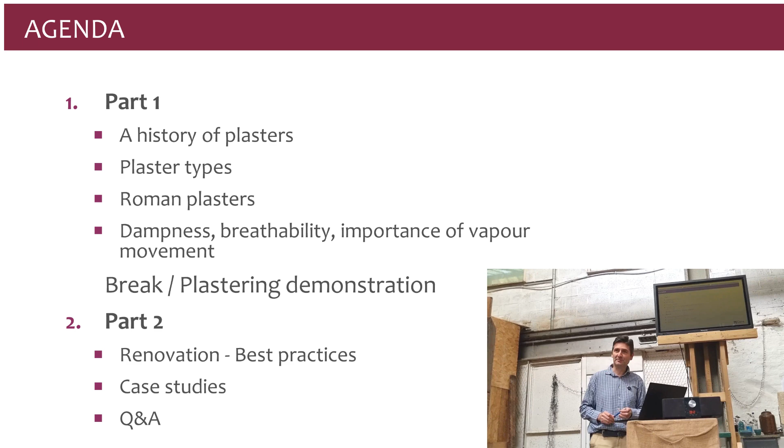And then also at the end, the Q&A, you can ask about any project, anything. So I want to keep it interactive. If you have any questions, the whole purpose of the CPD is to learn as much as you can. Hopefully, it's going to be new. So in the first part, we're going to talk about the history of plasters, various plaster types, where these Roman plasters kind of fit into the conservation concept. How can you utilize them? How does it compare to the other plasters?

And then in the second part of the first bit, we're going to talk about dampness, breathability, the importance of vapor movement, very, very, I think, important topics in old buildings. And then the break. And the second part is going to be about renovation best practices, some case studies, Q&A, and anything else you want, really.

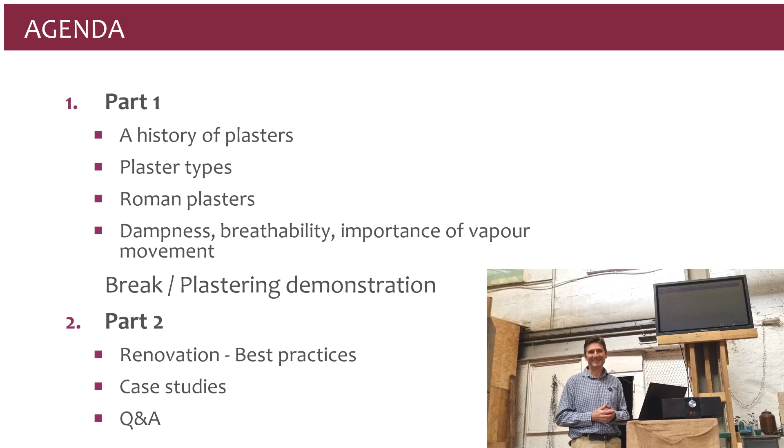So my name is Val. I'm an electronic engineer, my first degree. I have been working in building conservation for over 10 years. I do a lot of surveying work and project management. A few years ago, we started research, which kind of grew itself into a PhD. I'm doing a part-time PhD at the University of Strathclyde.

We have been operating since 2013. Generally, our specialty area is dealing with old buildings and dampness-related problems, which is quite a few of these cases, unfortunately, and focusing on building-friendly remedies, on Roman lime plasters, on lime technology in general, and also doing research.

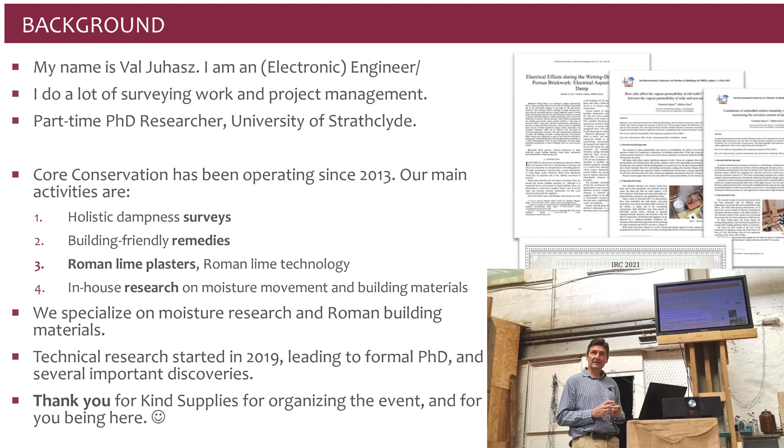So, plastering technology is an important part of dealing with dampness in old buildings, obviously, and we know that Romans 2,000 years ago built buildings and some really impressive pieces of work, many of which actually stand today. And they are an example for all of us. We're trying to figure out what they have done to some extent and follow their footsteps.

They have created special lime mixes, some of which are available, some of them are not available. And many of the things the Romans were actually able to sort completely with lime, now we're dealing with cement, unfortunately, and we're kind of resorting to modern materials.

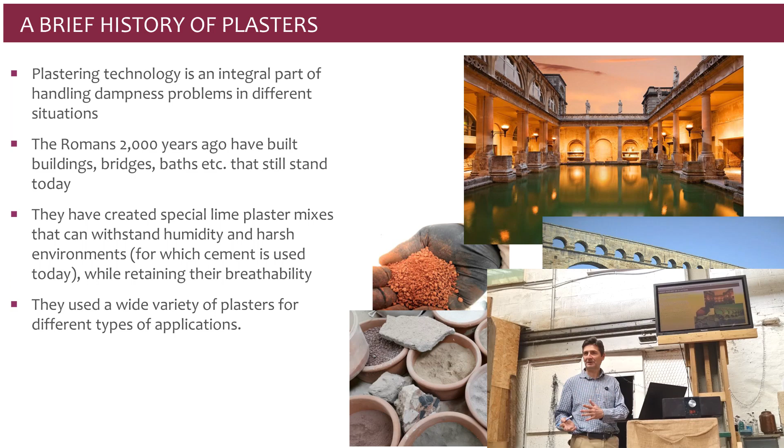So a bit about the history of plasters, just to put everything in context. Lime was first used around 6,000 to 10,000 BC. The dates are kind of vague, a long time ago. And then when the Roman Empire was going on, initially the Romans started working with softer stones, typically tuff, pumice, and so on. These were the easier way to build because they were not very hard.

The strength of these materials is around 20 to 40 newtons. It's about the same strength as what we have today. Old bricks, that's the strength, around 30 newtons. And as they went along, the problem they ran into is that when these softer stones were subject to open air, ice and frost, they started disintegrating.

And also, for example, pumice absorbs 15 to 23% water, and when they get wet, they lose their strength. And this can be also seen today. If you have very old buildings, they get very damp. The bricks start going and crumbling. So, from a Roman viewpoint, some of these buildings lasting 150, 200 years, that wasn't good enough. They needed to do something about this short lifetime.

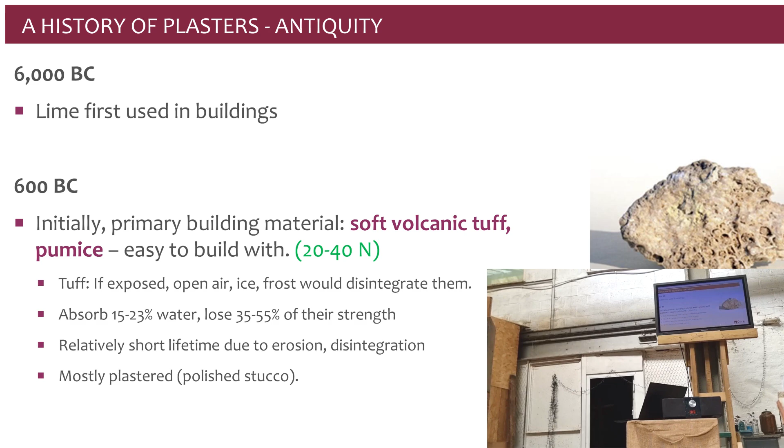And as a result, very commonly, they have plastered. They used a polished plaster, something similar to what we have over there. It's a very smooth finish. We're working on a project with yourselves, with Andrew, and they have created this very polished, almost glass finish, and this is actually waterproof.

In about 3-4 millimeters, you can actually create with lime, with various methodologies, completely waterproof finishes that breathe very well. And this has been used for these soft stones.

And then throughout about 1,000 years, the Romans actually started changing their technology, how they have been building. And another 300 years later, around 300 to 200 BC, they started using moderately strong stones. And these are kind of limestone, marble, sandstone. These are very similar to the UK stone buildings. They are stronger buildings, about 50 to 100 Newton compressive strength.

And what they realized, it wasn't the perfect solution, because when a fire erupted, because they also had timber buildings, then these, especially the limestone and the marble, expanded as a result of the heat, and they started cracking. And this is also well documented. So around 600 degrees, they started cracking, and again, it wasn't good enough for the Roman longevity. So they started looking for other solutions.

Also, they developed the mortar technology, and around the same time, they started developing hydraulic mortars, or Roman concretes. These were limes mixed with volcanic sands and ashes, and we can see on the photo there. These are the pozzolans. The pozzolan is coming from the Italian town Pozzuoli, which is close to the volcano, and these are red, gray type of lava materials, lava sands, and they were mixing it with lime, and as a result, they were creating these different mortars, stronger mortars, but completely breathable mortars.

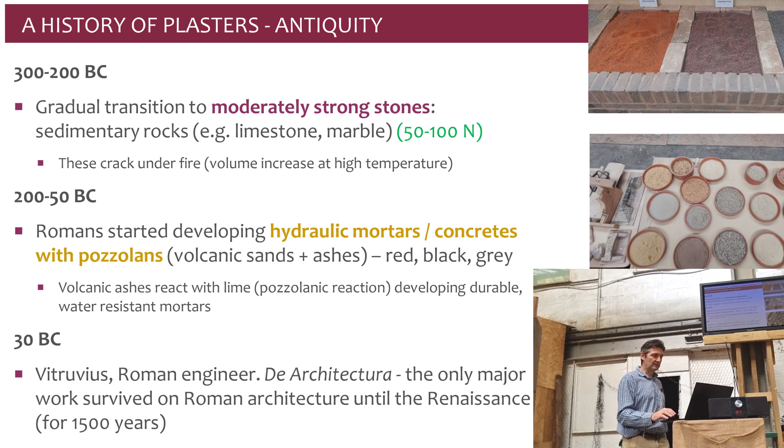And how do we know about this? About 30 BC, there's a Roman engineer called Vitruvius who wrote a 10-volume book, De Architectura. And this is important because it's the only major work from antiquity about Roman architecture which survived up to the Renaissance, about 1,500 years later. And it has been translated to English, and it can be downloaded because there's no copyright on it. So the Romans improved the mortars and the stones.

And then later on, another 400 years, because it was a slow, gradual change, they transitioned to hard lava and volcanic rocks. These are basalt and so on. These are the strongest, like granite type of rocks. They have 150 to 350 newtons, about 10 times stronger than brick. And for this, they also developed more durable hydraulic mortars.

Because what they realized is that if we have an old wall, we have stone or brick, and then we have the mortar, which kind of links everything together. And the mortar was the weak link. If the mortar is not holding well, then eventually the building will not last. In a lot of the large buildings, cathedrals and so on, the stones are actually holding everything together. But the Romans realized that they have to improve the mortar in order to make it similar to the stones.

And in this era, they created some really complex architecture with massive buildings, imposing spaces and so on. And two of them, which we see here, are the Colosseum, from basically 78 years after Christ. And I found a research paper. Everything is lime-based. They had structural lime. For example, the foundation is 6 meters thick. The Colosseum is actually sitting on a 6 meter thick lime slab, which just tells what the Romans have done. They have done what we today do with cements, and those don't last as long by a long shot.

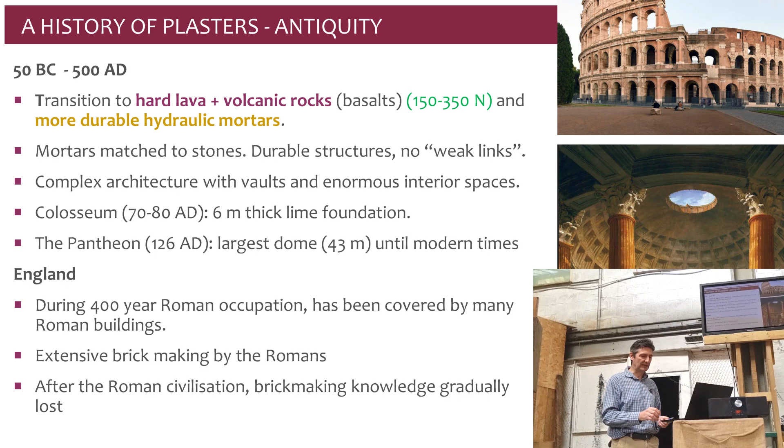And unfortunately, once the Roman Empire fell apart, this knowledge was also to some extent lost or went into decay. And this leads us to the Dark Middle Ages, which was 800 to 1,000 years. And generally, this saw a widespread decline of the quality of lime and brick making. Very few buildings in the whole of Europe are older than the 11th century. So there were about 500-600 years from which nothing survived. Anglo-Saxon buildings usually were made of wood, initially rarely of stone. And the Roman limes were abandoned and forgotten.

Generally, even when they started picking up the lime, it was low-quality lime due to impure sands, poor mixing, low kiln temperature, lack of technology altogether, and total absence of the natural pozzolans, because these were not available; we were not a volcanic country. They had been imported by the Romans everywhere, and then that stopped. So the lime burning technology in the 9th to 11th century was lost, and then it started picking up in the 12th century onwards.

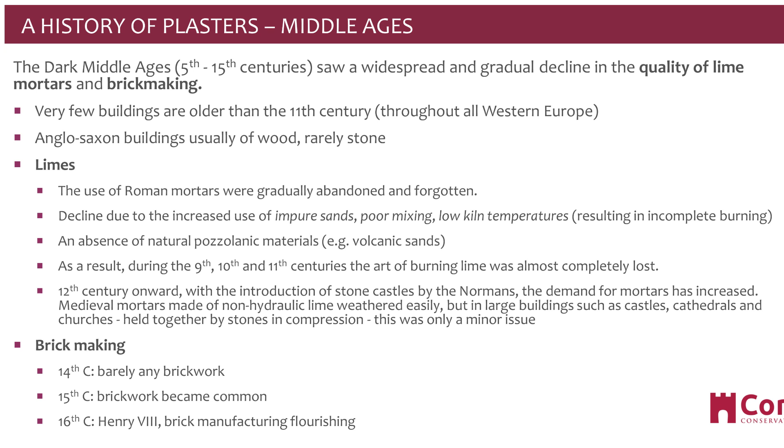Brick making was a bit similar. Until the 14th century, there was barely any brickwork, and then in the 15th, 16th century it started picking up gradually. All this information has been collected from references. And this leads finally, after 1,000 years, to the Renaissance.

One interesting point here was the rise and the power of the church as an organization, or the churches. And everything from Rome has been declared unchristian and pagan. And as a result, the Roman art, the culture and literature, everything kind of fell into disgrace, and they said we don't want anything to do with it, which actually was part of this whole process.

And after nearly a thousand years of dogmas and belief of the Middle Ages, science started coming to life, and they started saying, you know what, we want to learn, and they started rejecting these dogmas. And as a result, as part of the Italian heritage, Italy was again the cradle of the Renaissance. It started at the end of the 1300s, through the 15th century, and started spreading throughout Europe from that point on.

And English noblemen visiting Italy were looking at the castles and pretty much the Italian architecture, and were thinking wow, and that's how it started spreading. The English Renaissance started about 100 years later. With the Tudor period, wars were finished, everything started actually opening up.

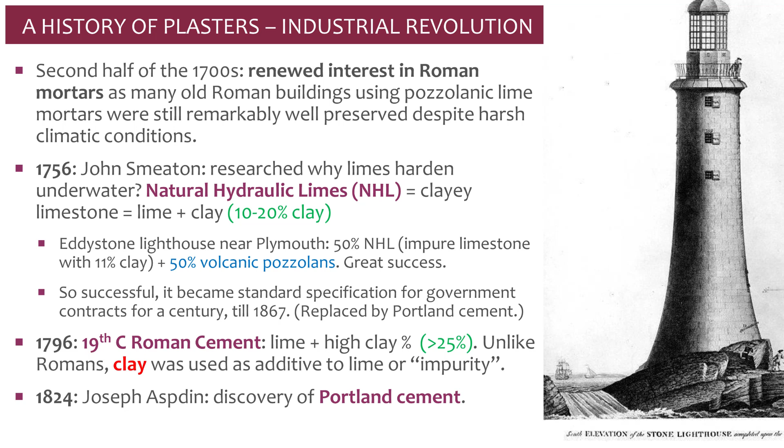One of the very successful projects was the Eddystone Lighthouse near Plymouth. They used 50% NHL mixed with 50% volcanic pozzolans. It's just one of those milestones. They had access, they purchased these Roman materials, and the project was so successful. And by the way, as far as I know, it has been relocated, but the building is still standing.

It has been so successful that this specification, Roman materials and NHLs, was kind of a nationwide specification for about 100 years. It eventually got replaced by Portland cement. There were also, towards the end of the 1700s and early 19th century, the Roman cements. You might have heard about them. These are the 19th century Roman cements. They were similar to NHL, only they used higher clay content, and they created some good buildings.

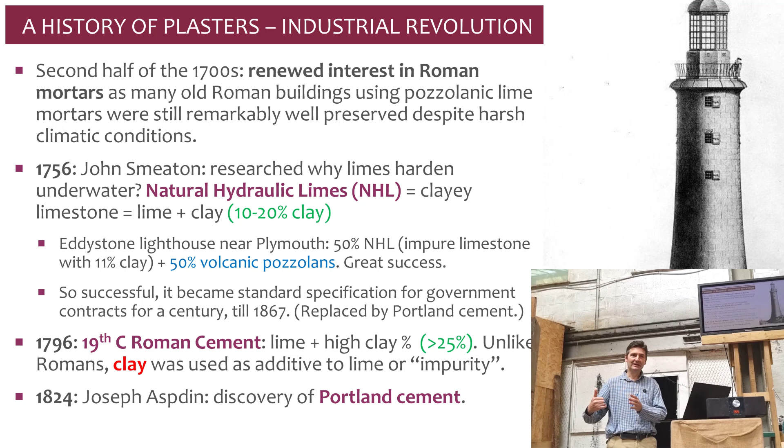And then in the mid 1800s, Portland cement started taking over, and we have been pretty much in this for the next 100 years. A question which obviously we should ask: why did cement become so successful? Why wasn't lime good enough? The reason is because cement carried the promise, the potential to overcome some of the inconveniences or shortcomings of limes. One of them was slow setting, which in the Industrial Revolution, when you started building fast, was an issue. Time is money, as they say.

And we get this feedback today from lime plasterers, maybe not from here, but some of them say, I wish it would actually go up faster. Or some plasterers in general don't deal with lime because it's just too slow and too this and too that, and it's too complicated and so on.

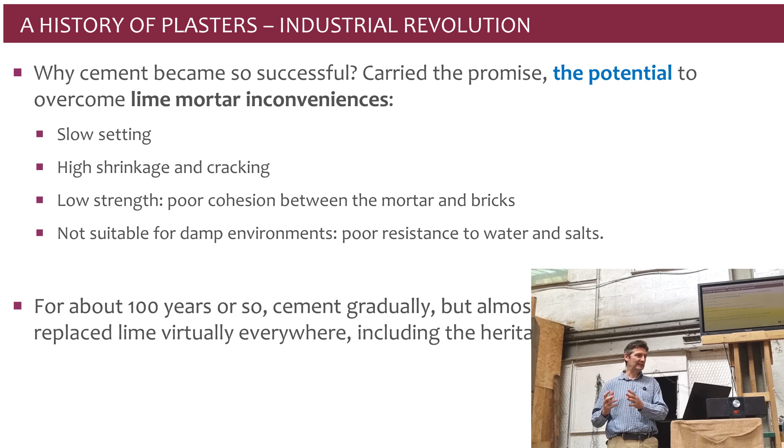It had high shrinkage and cracking, low strength, poor cohesion between the mortar and bricks, and was also not suitable for damp environments, with poor resistance to water and so on. These were some of the points the literature mentions that they were not happy about. And cement was giving the promise that they could do something without any negatives. So cement over the next 100 years gradually, but almost completely, replaced lime virtually everywhere. We can see this today, unfortunately, including the heritage sector.

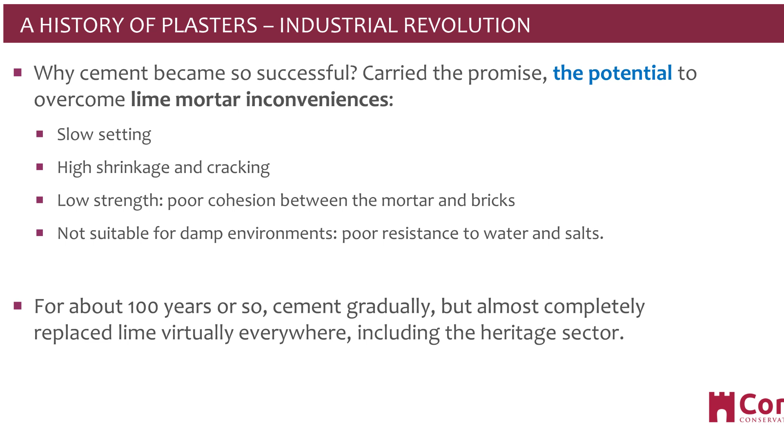And then we learned that this wasn't the best idea. It was lacking research, because cement was rigid, brittle and stiff, with issues with breathability. It was cold, causing condensation, and non-compatible with the building fabric. The high salt content leaches and damages the old masonry, and you are aware of some of these things. These negatives of cement caused and are causing major issues in old buildings, significant dampness problems, the decay of old fabric, and obviously it doesn't last very long. It will start coming off.

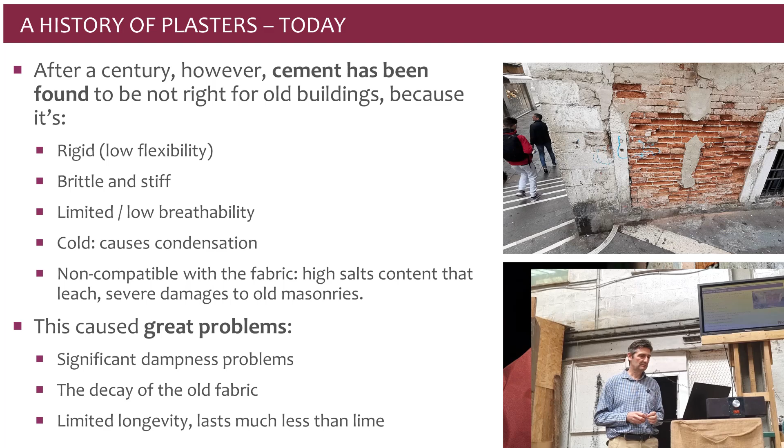So where are we today? After the 50s, 60s, 70s, when lime had been forgotten for about two generations, there is now a lime revival, and Historic England is reinstating lime. As a result, we try to go back to the pre-cement era of about 200 years ago, actively campaigning against cement in the heritage sector, with it being forbidden in listed buildings.

Softer lime is the only accepted material; it is the most favored material. And NHLs, which are relatively new materials, are also questioned due to their hardness and reduced breathability. That's where we are now. And the question is, are we on the right track?

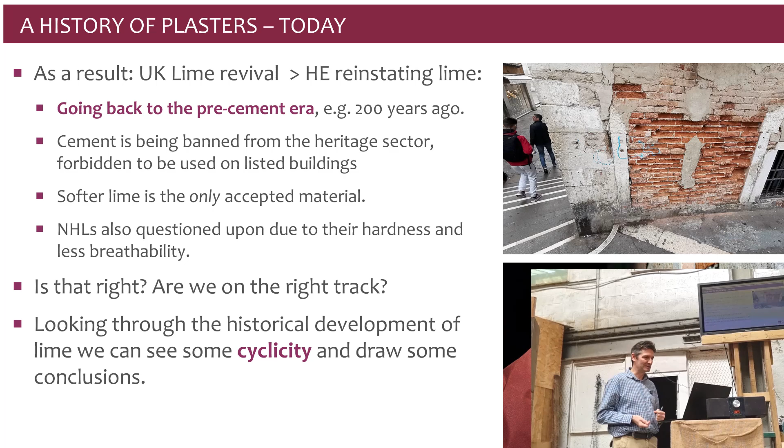Is that correct? What was interesting, as I was doing the research on this whole lime cycle, I spotted a cyclicity in how things are going, because we know the saying that history tends to repeat itself. We go in cycles. Fundamentally, throughout history, lime has always gone through two development lines.

One of them is the normal limes, also known as air limes, aerial limes, putty limes, and so on. These are the sticky substance; that's the origin of the word lime. It's sticky, it binds the bricks together. It goes back about 6,000 years, and these limes harden in contact with air, with CO2. Primarily, this lime has been intended for dry environments, and that's where it performs really well.

This technology was lost to a large extent during medieval times and was recovered after that. We have it, and we're doing research and trying to get it back as much as possible to use it and benefit from it. And there was a second development line: the hydraulic limes. The old textbooks call them water limes, which I think are pretty good names, air lime and water lime, because it's not complicated and tells you the essence of where they have been used.

These go back about 2,500 years. Originally they were made from lime and volcanic ingredients, and they harden in contact with water. It's a completely different mechanism, a pozzolanic reaction. These limes were intended for damp environments; that was the purpose they were invented for. This technology was also lost after the Roman Empire collapsed, and it has never been recovered.

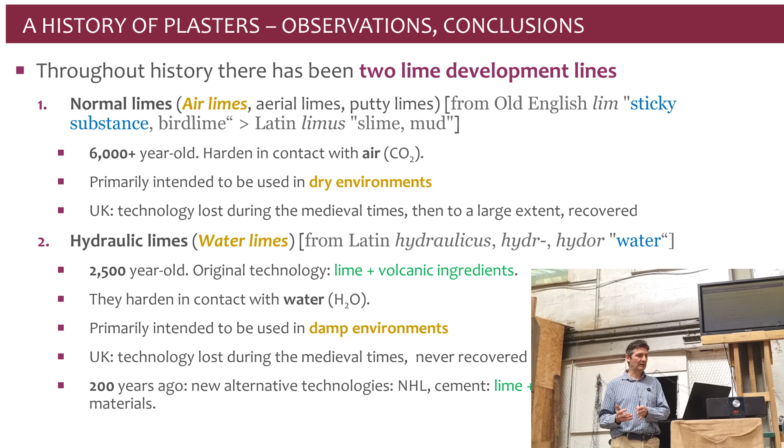Here, at least. And 200 years ago, the problem of the missing water limes was there, and they were looking for a solution because we are in a fairly damp climate in the UK. This is when NHL, cement, and other technologies came during the Industrial Revolution, which are different because they're lime and clay based. They supplemented the volcanic ingredients with clay. They work similarly, but there are fundamental differences between them.

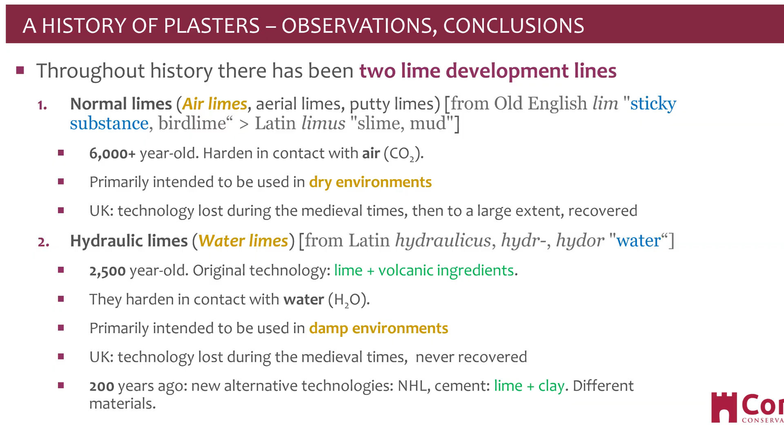Where we are today, fundamentally, is that NHL is questioned and cement is not good. We have air lime, which works well in many instances, but it also has its inherent limitations. And we don't have the whole water lime technology. Something is still missing. NHLs were trying to bridge this gap with variable success and variable acceptance. What we are trying to do is reinstate this old traditional technology in the UK.

We were invited to some architectural talks about 5-6 years ago, went to Italy, were exposed to this technology, and since then we have been working with one of the Venetian restoration masters, who liked that we want to do something about this technology. At this age of his life, he's over 60, so it's not about money. He's been doing this for a very long time, and he's trying to pass on the legacy to as many people as he can in order to make it survive.

When we kept going back to Venice, we asked, "Can we learn? Can he teach us this technology, at least give us some of these things back?" And he said he would be more than happy to do so. Then we kept going back twice a year, religiously, and we have been working with him for about a year and a half.